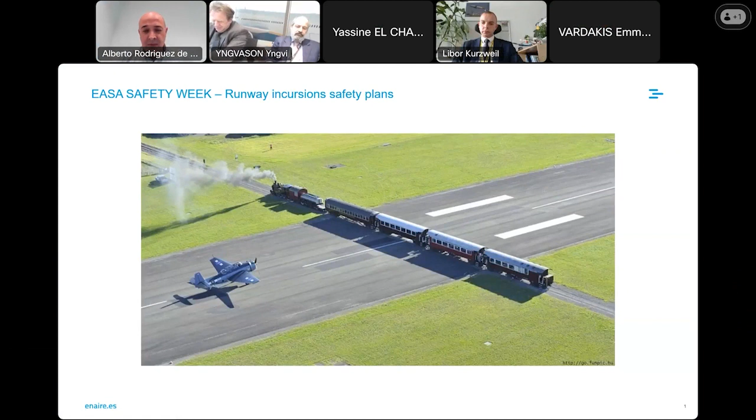That's great. So probably when you think about runway incursions, this is the image that comes to your mind: a mobile crossing from side to side on a runway. But this is not the only type of runway incursion. You have a very specific one, which is not obvious if you think about the concept, and this involves insufficient separation between departing traffic and a subsequent arrival at the same runway.

This situation can be really dangerous because it can lead to loss of separation on the ground or to very nasty piggyback go-arounds, just like the one we witnessed at Austin Airport in Texas, when a FedEx cargo flight performed a go-around just above a departing traffic that was on the takeoff roll. So this is also a very serious incident that even happened in IMC, as far as I know, which prevented some barriers to recover from the nasty situation.

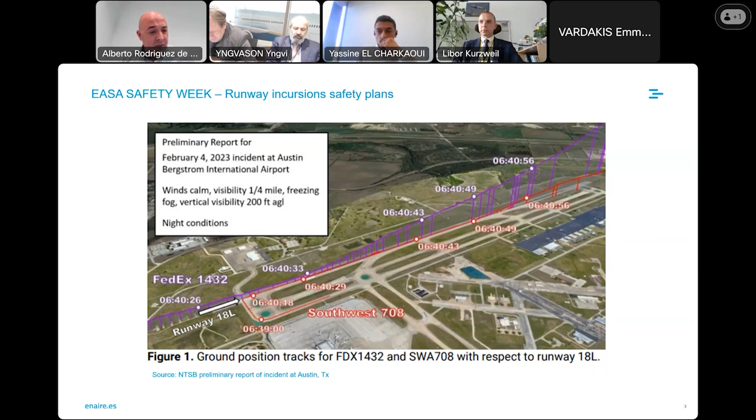So let me share some experience we had in one of our ATS units, which is Malaga Tower. Back in September 2019, we identified a series of high severity incidents. Some of them had not been reported by ATC, so we had to start a monitoring process. This included an automated monitoring of operations in order to detect all losses of separation between departure-arrival sequences. The detection rate with this kind of approach is almost 100% of occurrences of all severities.

In terms of safety monitoring, it's very good because it provides a very complete picture of what is happening at an ATS unit, but it has other impacts. As a drawback, it may distort the perception of how safe an ATS unit is, since the ever-present underreporting factor is removed from the equation. But as a positive impact, it allowed us to gather very useful and essential operational safety information. But by that time, we were not aware of that.

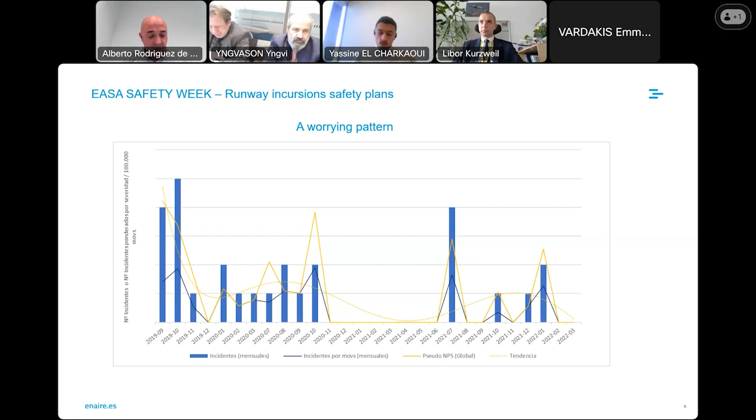The first series of high severity incidents required an integrated approach. There was an overall analysis of all incidents of that type that needed to be further understood under a much broader perspective. So the initial steps involved a lot of analysis, then understanding the underlying factors in order to have a complete systemic diagnosis. Apart from identifying the symptoms, the runway incursions we were having, the underlying factors are the important ones to disclose, to discover why your ATM system is suffering from a very high fever.

So the first analysis led us to have this influence factors tree, so to say. This included the historical set of incidents of that type, so we went back in time to have a look at what's going on. The overall analysis took about 1 month to be completed and triggered the development of the first safety plan, or the first stage of the safety intervention. That was also audited by our NSA and the Official Accident Investigation Board in Spain.

So contrary to our thinking about the usual suspects in incidents, language was found not to have any influence on the occurrences. However, operational culture was a key factor in the operational reality. So the factors that we identified, from the closest ones to the operations, like the ones you see at the bottom of the screen, related to human performance factors anchored on strong cognitive biases, then event proximal factors that were very close to the event, shaping the human performance.

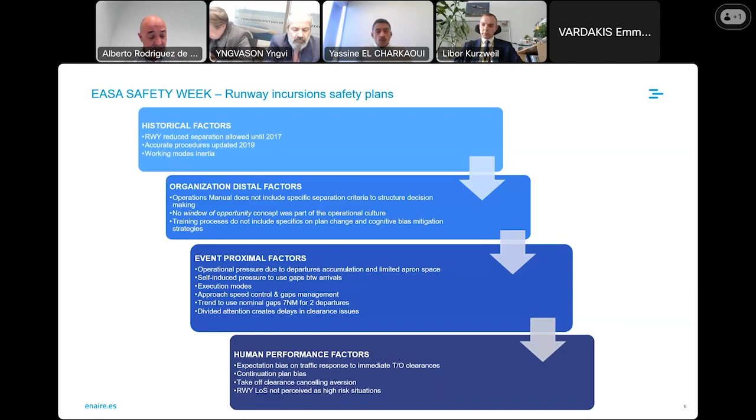And this included operational pressure to use nominal gaps for 2 consecutive departures, and some organizational factors related to the operational manual and training. And finally, cultural factors very deeply rooted at the unit, which were linked to long-standing operational habits. These habits were due to a previous situation where reduced runway separation minima had been used, but we removed them due to an incident. So what used to be a normal operation turned overnight into runway incursions.

So as you can see, the initial plan that was thought to be the only plan quickly developed through the journey and turned finally into a 3-stage plan. So without having managed each stage, we wouldn't have been able to identify the next steps. Everything was complemented by a lot of normal operations monitoring, both on site with over-the-shoulder observations and automatic. And we also had a lot of vigilance and safety governance by our operational safety committee at the company.

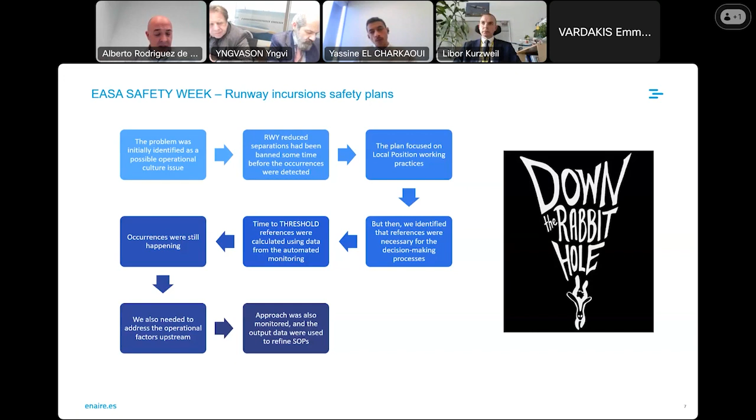The action plan started focusing on the local position working practices, as I said before, but we identified the need to develop further aids for ATCOs to support their decision-making processes by calculating and estimating time references for them for better sequence management. However, at the first steps, we were still having some occurrences, so we kept on analyzing upstream.

In essence, this is the overall map of what we were doing. So we were unwinding the safety plan along the way. We were taking off the peels of the onion so that each stage came naturally to the next one. So in essence, what we did during this time, we were applying an iterative safety plans scheme based on a series of backbone elements.

So the first one took about 4 to 5 months to be implemented because training had to be provided for all ATCOs. However, many of the procedure-related documents were ready in about a month since the beginning of the first plan. It was required to be audited, inspected and overseen by the NSA and the Accident Investigation Board. But the reality is that we had already started and developed quite a lot of the plan when it was formally required.

Besides, the top management supported the plan at the highest level with the Operational Safety Committee, which is composed of the top management of the company. And the ATS unit management involvement in the definition of the plan and in its implementation was key to the plan's success, due to the fact that they even proposed a lot of recommendations that were not included at the beginning of the plan, and they started speeding up the implementation of some of the measures before it was required.

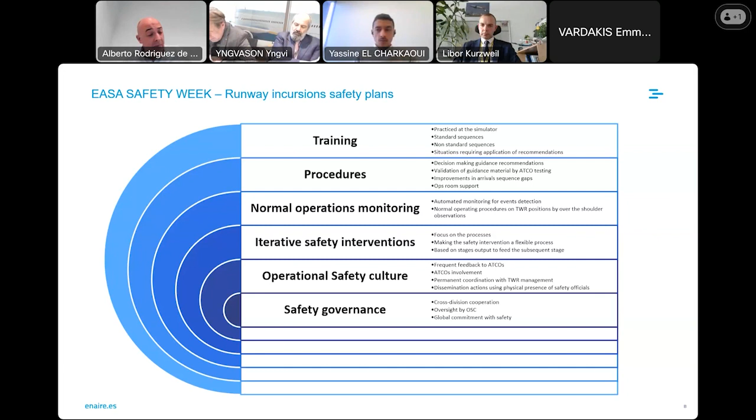So in a way, we needed to find ways to measure ATM performance when you're working on safety. And if you have to focus on this, you need to develop some metrics to see what's going on and to measure and see if things are working. So while monitoring for undetected occurrences, we were gathering a huge amount of information that could further be exploited. So we used that data to measure how the system was performing.

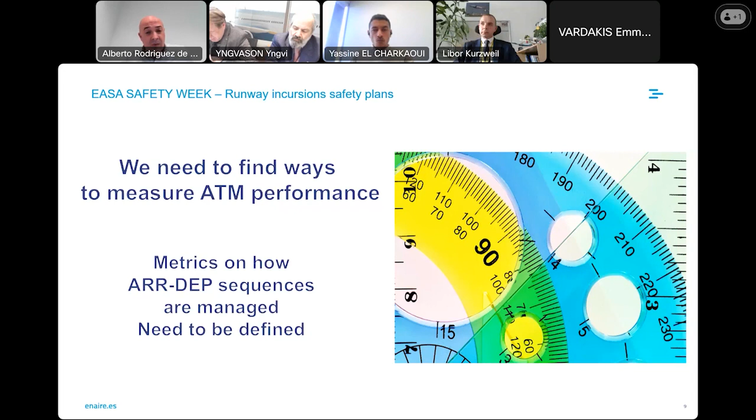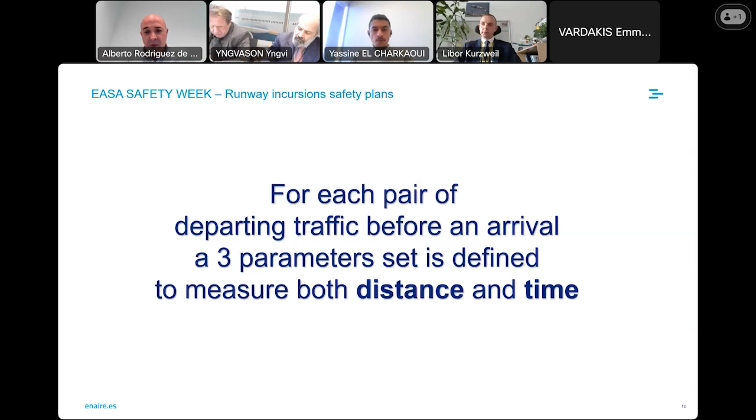We developed these metrics to understand how sequences were working. So for each pair of departure plus arrival traffic, we defined a set of 3 parameters that were aimed to measure both distance and time. I will explain a little bit more, and we'll go a bit technical here. So the first parameter measures, when the departure traffic is crossing the stop bar, where is the next arrival? This allows us to measure how the planning is done.

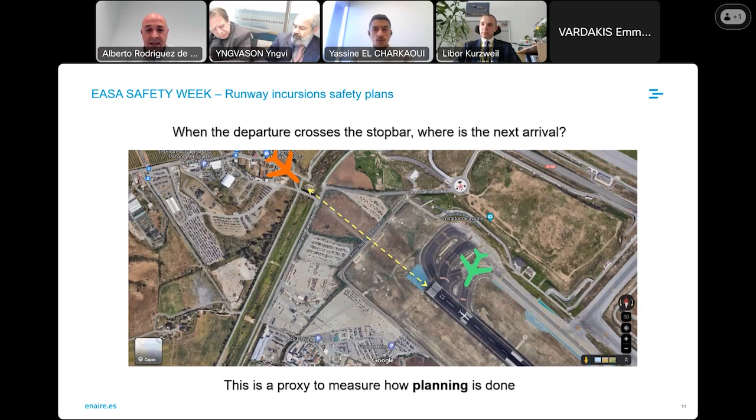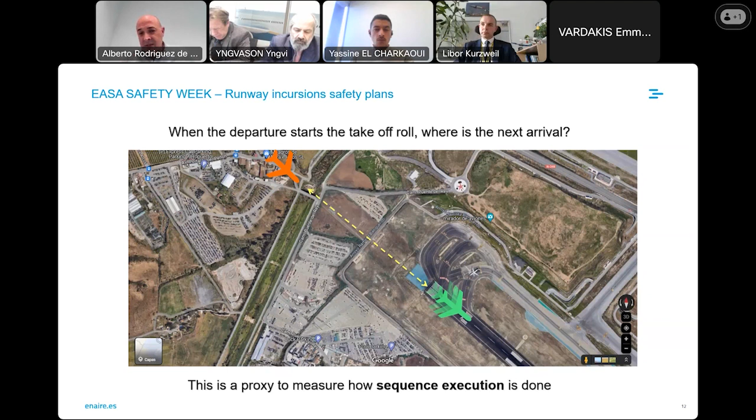The second one measures, when the departure starts the takeoff roll, where is the subsequent arrival? This allows us to measure how the sequence execution is done, because if it's too close, the ATCO is supposed to stop and cancel the takeoff clearance. So this is measuring how tight the operation is.

And finally, we also measure when the departure overflies the opposite threshold, where is the next arrival. So this is also measuring how tight the overall sequence management is performed.

And this is a very provocative question. Does safety management actually work? And how do you prove that? Do you really change the world when you issue safety recommendations? Sometimes it's really difficult because it's such a complex system. It is even difficult to understand when investigating, and moreover to say that due to a recommendation things are changing. Maybe it's not your recommendation, maybe it's something else. But it's always interesting to see and to focus on that kind of questions.

So we took all the data, we took all the information that we had gathered through the multilateration system and analyzing all that kind of radar data, and we computed this set of parameters. So this first slide is showing the position of the arrivals when the preceding traffic, departing traffic, is starting to line up. So we measured and showed in this kind of chart the difference between the situation before the action plan and after the safety action plan.

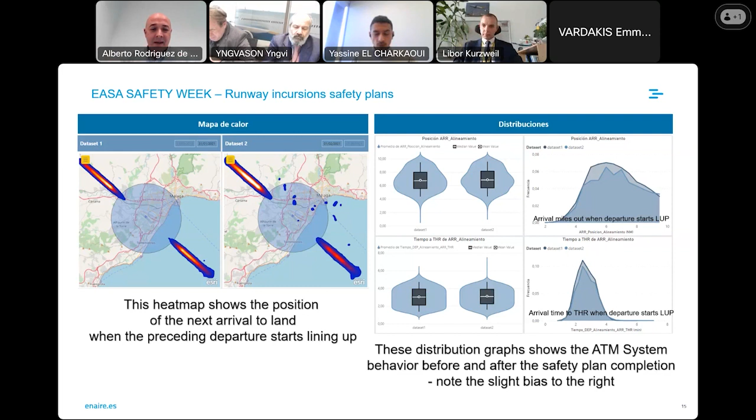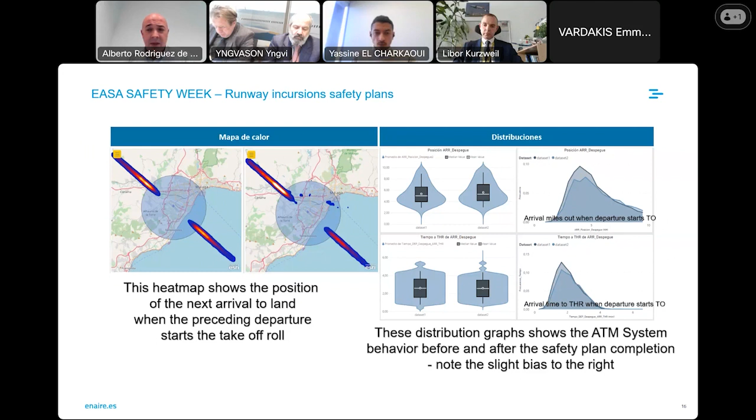And we started seeing some very slight differences that needed to be statistically tested. We noted a kind of a bias to the right, showing slight hints that things were changing at the tower. This is the same that we did when measuring the second parameter. Where is the next arrival when the departing traffic is starting the takeoff roll, and this is the final situation. So we blended all together into some statistical analysis, and this is what we found.

Maybe I will not get into the numbers, into the details, but we took measurements from dates long before the start of the plan and long after it was completed. In total, we processed about 9 months of multilateration tracks, and all parameters were tested to show whether there were significant differences in the samples before and after the plan. And this was confirmed by the tests that we used.

So the method was found to be so useful for understanding how our system worked that it was exported to some other ATC tower units like Tenerife North, where we performed a very similar analysis, and to Barcelona Tower, also applying to the cross-runway configuration to measure this kind of stuff. Now we are in the process of using ADS-B tracks to perform this kind of analysis as well, and to measure where we have no surveillance systems on the ground.

We used a lot of statistical packages here. We developed some Power BI reports, and we developed some Python scripts from standard libraries. So we did not do any rocket science here. We just use Seaborn, Matplotlib, NumPy, Pandas, and SciPy. If you're familiar with Python, you will know all of them for sure.

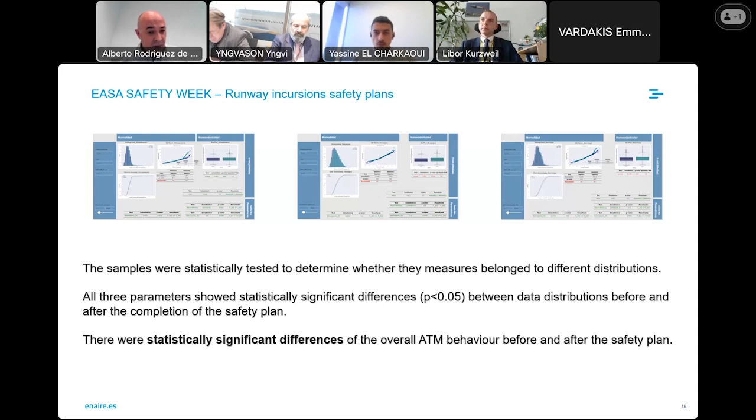So finally, the performance metrics show that there were slightly better values, which were supported by a reduction of the number of occurrences. So in the overall behavior of the ATM system, when the departures were cleared to line up, the next arrival is a bit farther away than before the plan. Then when the departures were cleared for takeoff and started the takeoff roll, the next arrival is a bit farther away, but not too much. And when the departures were overflying the opposite threshold, the arrival is a bit farther away.

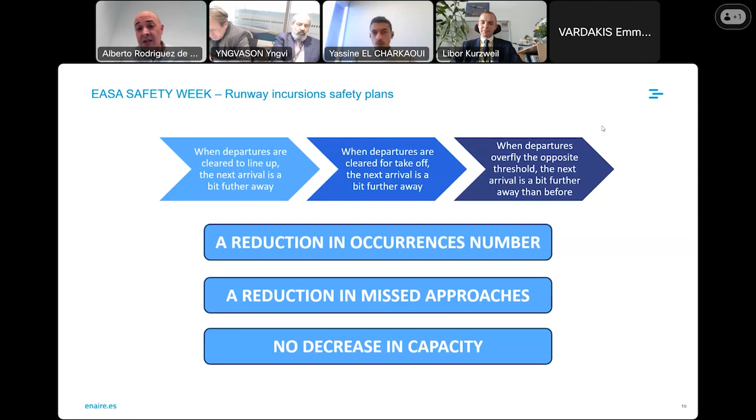The good thing is that it was combined with a reduction in the number of occurrences, and there was no decrease in capacity, which is, as you know, the main opposite force that we need to overcome in terms of safety improvement. And there was also a reduction in the missed approaches, which is something quite good for aircraft operations as well.

We still were detecting a number of, not worrying, but a number of losses of separation. And we found out there were some issues with the speed management and the final speeds the traffic were having. So we applied the same approach to the speeds. So we analyzed by using radar tracks. This time were radar tracks. And we found out that there were significant differences per aircraft family type.

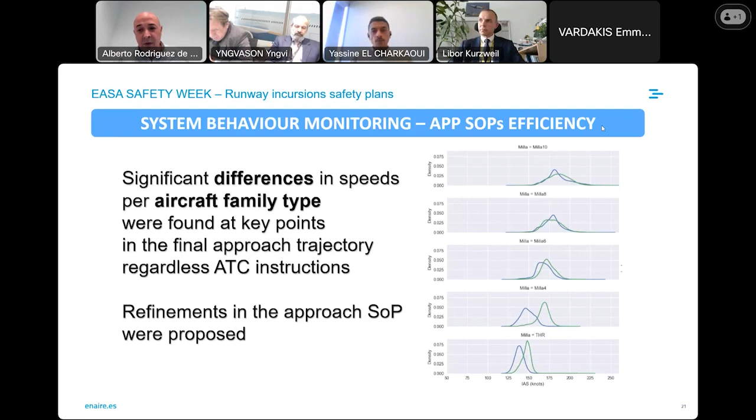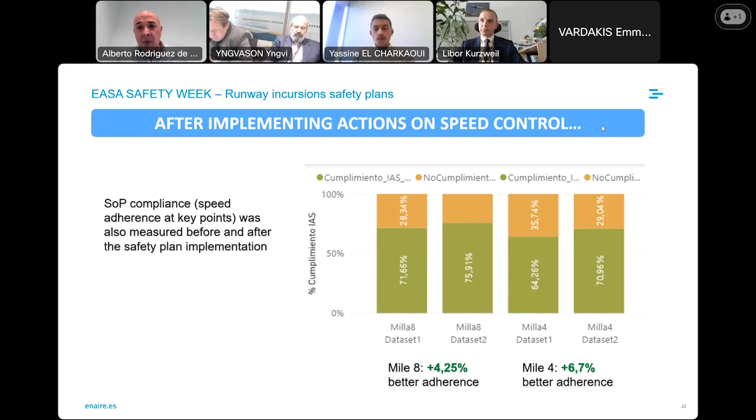So after some tweaking of the procedures and the SOPs at the approach sectors of Malaga, we also applied the same approach and measured how many of these traffics were complying with the speeds they were supposed to have before and after. And we found out that at mile 8 and mile 4, there were significant increases in the adherence, like about 4% and almost 7% at mile 4, which is the key mile when you need the traffic to be stabilized.

Moreover, we did a bit more. So we needed to see what was going on in terms of occurrences, in terms of simultaneous presence of two aircraft on the runway. So by using the monitoring period, we took the number of all the times we detected this kind of event before and after the plan, and we calculated the ratio of the number of positive detections divided by the number of hours of observation, of analysis.

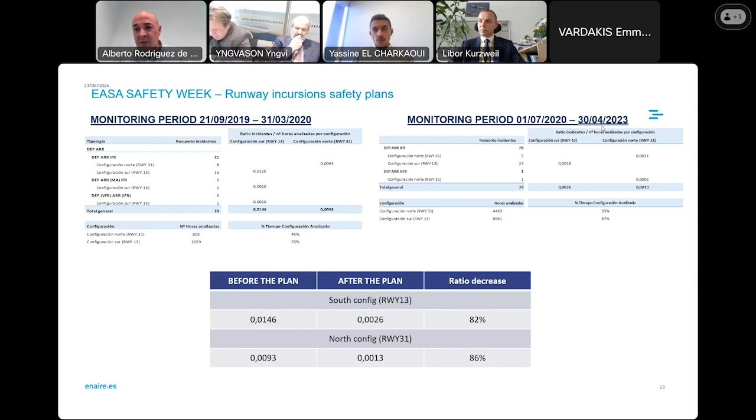And these are the numbers. So before the plan, we had 0.0146 detections per analyzed hour, and this was reduced by 82% on the south configuration after the plan to 0.0026, and you can also see an almost 86% reduction in the number of events that were precursors of runway incursions, of this type of runway incursions.

Then you have to ask yourself if safety plans have long-lasting effects, and these are the numbers. So it's really hard to state, but we found some factors supporting the idea that the plans had worked. One of them is the real change in the ATCOs' mindset that you can see and really feel when you are there and have a look at how they work and really worry about that when working on a local position. And this is also observable in the over-the-shoulder observations and informal surveys.

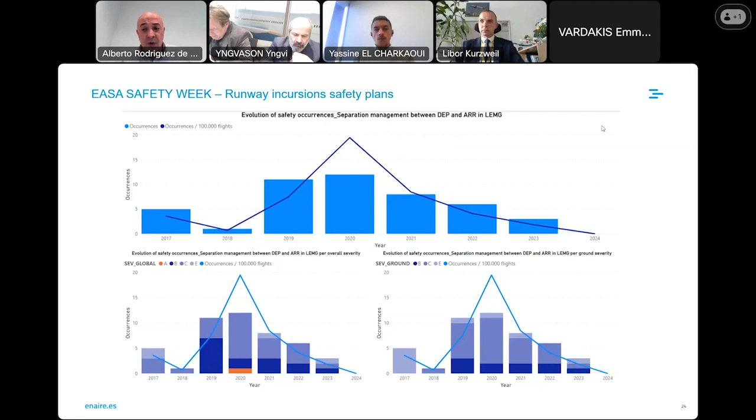And another one is this kind of graph where you can see the reduction in the number of incidents of this type and the ratio when you divide by the exposure available, which is the number of traffics.

The key messages from my presentation, which is a bit longer, so I'm sorry, I just overshot by a couple of minutes: you need to adopt a systemic mindset when diagnosing a safety issue. So you need to look for interaction of factors instead of looking for single root causes. You need to be aware that complex contribution interactions require combined approaches. You need to analyze and understand your system before attempting any safety initiative.

Be flexible with the plan, really flexible, and with the approach if you want to have long-lasting effects. Be aware that cultural changes may take a long while to be visible, and it is very positive to be physically there, and not doing safety at your desk 100 or 200 kilometers away from the unit. You need to be there. Then the people will believe you and will be part of the solution and not the problem. So management and ATCOs are also key if you want this plan to be successful.

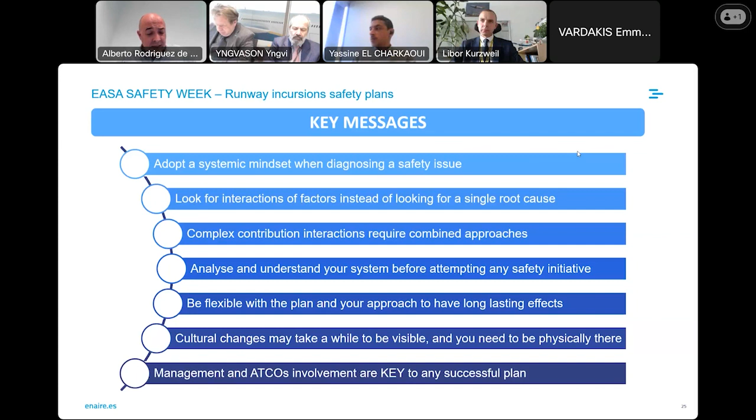So a final remark is that safety figures and occurrence information may bias your mindset towards how things actually work in an ATS unit when no occurrence happens. Things are never black or white, and it takes quite a lot of effort having a balanced and open mindset to understand the real system dynamics shaping its performance. And this is all I have for today. So thanks a lot for your attention.

Thank you, Alberto, for this very interesting presentation. Indeed, I realize, and I think everybody in this workshop should have realized, that this was not an easy task. It was not something that you decide to do today and it takes you a few weeks to do, but rather a long dive where you had to spend time and resources. You were supported by the commitment of your management, and I think that was a decisive factor there.

What I would like to know is, because I understand that this was a complex project, both from the analytical perspective and the implementation perspective, what was the most difficult part that you had to implement? What did you find most difficult to achieve?

And another sub-question, if I may, because we're saying that runway incursion is a multidisciplinary issue, and its prevention requires coordination with the other key organizations at an aerodrome. Did you actually need to communicate all your plans and the changes you implemented or planned to implement with your stakeholders there?

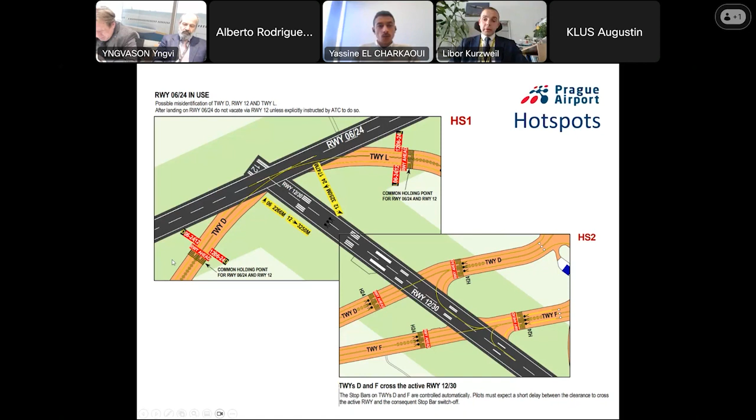And the second hotspot is the double crossing of taxiways Delta and Foxtrot across runway 12/30. And I will tell you shortly about the safety issues that we faced on these two hotspots and the solutions, how we treated the issues and what we did to improve runway safety and to reduce the number of runway incursions. Now, with the reduction, we can talk about roughly 0.4 to 0.5 events per 10,000 movements every year, and the rate is quite stable.

Okay, the local runway safety team. It was well presented yesterday by a number of speakers, so I will skip all the basics to save some time. I will only mention two things for consideration, maybe a best practice. The first one is the Microsoft Teams platform. This is what we created during the COVID crisis. We moved all the activities of the local runway safety team from personal meetings to Microsoft Teams. And now we are obviously fully recovered, but we use Teams anyway because it paid off, and we still have a lot of benefits from it.

So we have a place to share documents, we have a chat function, invitations to meetings, and for some members or companies that don't have enough time to be at every meeting, it is the perfect way for them to stay in touch and receive information from the runway safety domain. The second thing to mention, you can see that amongst our members, we have quite a high number of operators of business aviation aircraft.

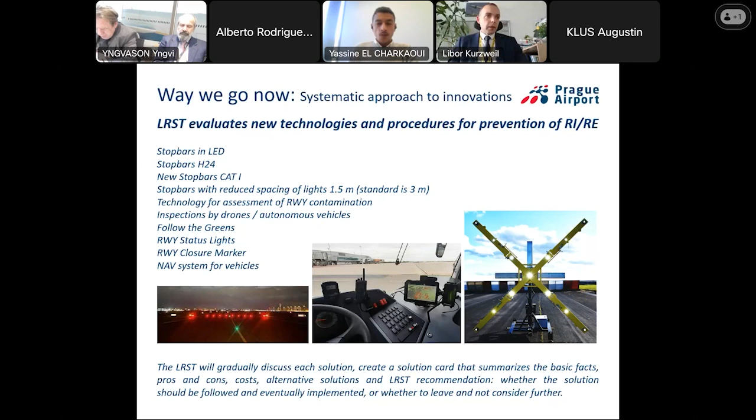So as for the navigation, this is interesting because it is a child of COVID. In the COVID crisis, we asked our IT colleagues if they would have time to develop something for us, and surprisingly, in a couple of weeks, they came back with an excellent application for both mobile phones and tablets, and we also have a version for the dispatch room, where you can see the map of the airport, all the live traffic from the A-SMGCS, own position. We have alerts for runway safety and also for apron safety.

This is the case displayed here, where the vehicle is alerted when the aircraft comes closer to the crossing point with the service road. So this is nowadays the big pillar of runway safety at Prague Airport, and we will continue developing this system for the future. We have many ideas how to improve it even more, and to me, it is a great example of what can be done if the people in the company have some free time, which was the case because of the COVID crisis.

So globally, you can see from this classification of runway incursion events that at the top of the list is aircraft or vehicle entry onto the runway protected area. We can see again at the top of the list runway incursion not specified. And this is a very important issue regarding reporting, because sometimes, not only for airlines but for all service providers, the reporting is not complete, and this is a critical issue. So when we report an incident, we need to make sure that all the information is included. That will allow proper investigation of the event.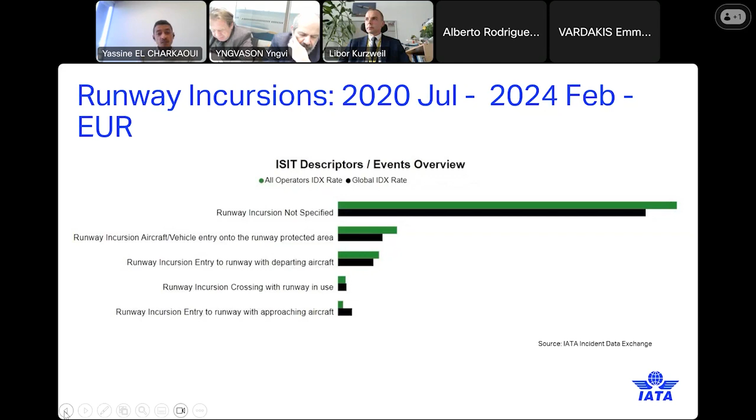So again, we said that there is a need for an additional set of measures to tackle this growth of traffic and also to mitigate the risk of runway incursions. As you all know, runway incursion is a complex issue that involves many factors that can only be addressed through a global approach involving air navigation service providers, aerodrome operators, aircraft operators, regulators, and so on and so forth. So as a result of that, the different stakeholders launched what we call the GAPPRI initiative, which is an initiative to address these risks through a set of recommendations, which are based on data analysis from different sources, globally and regionally, combined with operational expertise.

So, as far as the recommendations are concerned, we consider that GAPPRI is a very good mitigation measure. That is why we call on service providers, as some of our members are already doing, to conduct a gap analysis against GAPPRI recommendations in order to assess our degree of compliance with these recommendations. Based on this gap analysis, action plans can be developed, and most importantly, these action plans need to be coordinated. And after that, we'll discuss the role of local runway safety teams as a cooperation instrument.

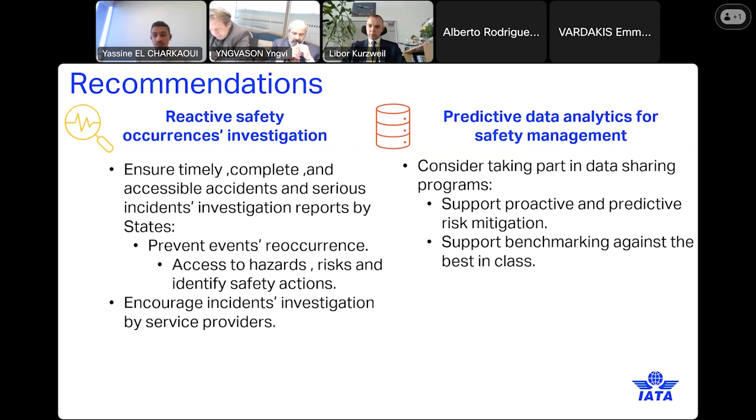I think there are a few items that we definitely need to take with us when leaving this workshop, the figures and the words you said, that the data shows, in my own words, that if we don't act in the future, there may be an issue that we will face. So I think this is something that we should very seriously take into account, not just regulators, everybody, and I guess this message goes across the globe. I would definitely remember that slide.

Now, we have seen the basic pillars of your presentation: the importance of the safety investigation, the need to have timely investigation reports, to have data quality when it comes to those investigation reports, because it's one thing to have something and quite a different thing to have something that makes sense, that you can actually understand and can search later on. And the importance of being able to act not just reactively, but also in a predictive mode.